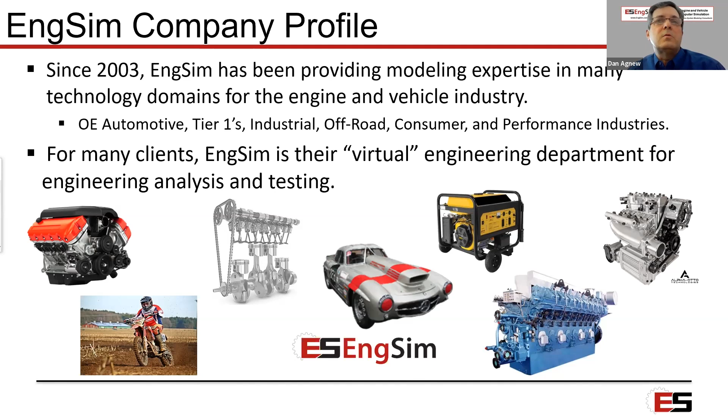And then some of our work is also with the big OEs and tier ones too. But for those companies, they might already have a lot of these capabilities. So we kind of fill some gaps where they may not have enough resources to do a particular job. So we may just step in and help them on some occasions where they just need a little bit of extra help.

Some of the domains that we work in, I mean, any one of these domains is a whole day's presentation on itself. But I'm going to focus more on the CFD, which is all the way over there to the right. But we also do a lot of work in engines as a whole, vehicles, electrification of any kind of vehicle, not just cars. Valve trains, that's something that I spend quite a bit of time in, and then also a lot of thermal analysis. That's becoming pretty needy right now. If you watch the newspapers with all the issues they're having in the electric car business, there's a lot of thermal issues there, and these kinds of tools can help a lot of that.

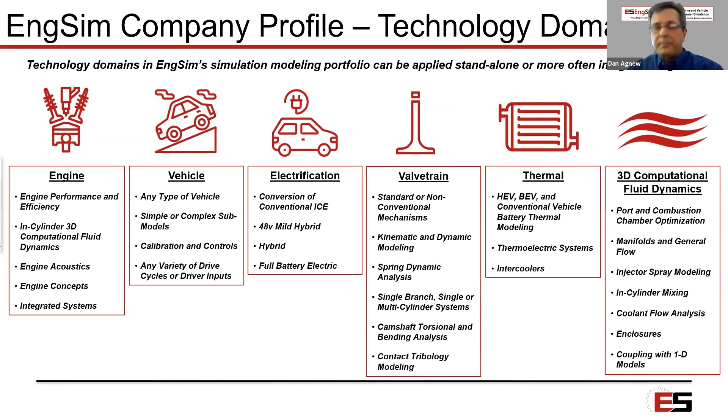You might ask yourself, well, why do we do this? Why do we care? I'm not pitching this as a replacement for good design and good testing, but actually a supplement for it. The testing is very important, and good design is very important. But this kind of analysis really makes that work much more targeted and efficient, and can improve the understanding. A lot of times with testing, you get good overall numbers, but you don't really understand why something happened. And this kind of analysis takes a deeper dive into understanding those whys. And you can take those thousands of crazy ideas and filter them down into just a few reasonable ones, and then go on with very targeted physical testing.

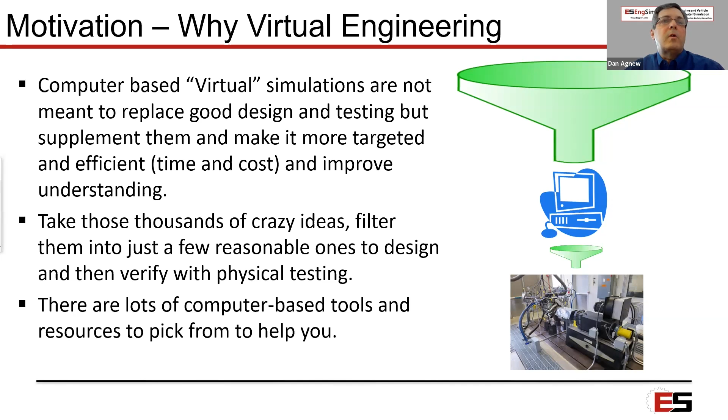For example, we're looking at a cam development program now with a race team, and they're trying to come up with a new cam, and they probably got 100 cams that they want to look at. Well, that's not very practical. They're going to blow up some dyno engines, burn a lot of fuel. We don't do any of that with this kind of analysis. So we can filter all those ideas down to just a few reasonable ones. And there's a lot of tools out there, and a lot of resources to help you pick from. So I'm hoping I can stimulate a little bit of that thought process to either look at some of these tools for yourself, or get some help on your projects from companies like us, maybe.

The 3D software that I'm going to spend most of the time today talking about is Converge CFD. That's the brand, and it's not a software that we sell. That's a software that we use. We actually have to pay them a lot of money to use this software. We're not a reseller, we're a user. We like this software because it's very well tailored to engines. Some softwares out there are really good at doing external body kind of flow work. Some of them are really good at internal flow work. And Converge not only will do it all, but it's really tailored to engine work, especially when you have moving pistons and moving valves doing transient flow.

And then if you want or need to incorporate a lot of the other physics platforms like acoustics, thermal, mechanical, chemistry is real big. If you're looking at doing combustion analysis, then you need a really good chemistry module in there. And electrical, if you're going to put a spark plug in there and light it, then you need some electrical physics going on there too. Like I said, this software is really well suited to doing moving pistons and moving valves while you're doing the flow. You can do turbochargers or water pumps with rotating impellers, that kind of work. It's really good at exhaust aftertreatment. That's not so much a topic for this kind of an audience, looking at emissions.

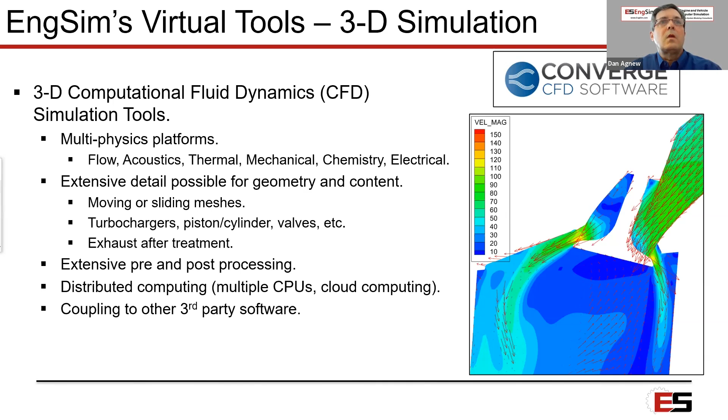Just a quick comparison, at the risk of maybe oversimplifying this, I wanted to go through this for a moment here, to compare this kind of CFD work with a traditional flow bench, if you're doing that kind of work. The resources you need: obviously on the flow bench, you need a flow bench. You need fixtures, machining equipment, testing accessories, you need computer software or a spreadsheet if you're doing any kind of data management with it. For the CFD, you need a computer workstation, you need software, and you need a license.

Personnel: with the flow bench, you need an experienced technician and a machinist to help you build your models. Similarly, with CFD, you need an experienced CAD or CAE engineer. For a test model on a flow bench, you need a flow box. You need something to test: the flow box or a head or manifold or whatever you're flowing. On CFD, you need a CAD model. You've got to have some kind of a CAD model to be able to work with.

And the output on the flow bench is pretty general and overall, looking at flow capacity or some in-cylinder motion, swirl or tumble. With the CFD, you get a lot more. Not only do you get that flow capacity and those general overall mixture motion kind of numbers, if you're looking at in-cylinder stuff like we're going to look at today, you get very detailed and localized speed and direction. You get heat transfer. If you move into some of the advanced combustion with transient flow, then you can get burn rates. You can mix fuel, air, PCV, EGR. You can put anything you want in there.

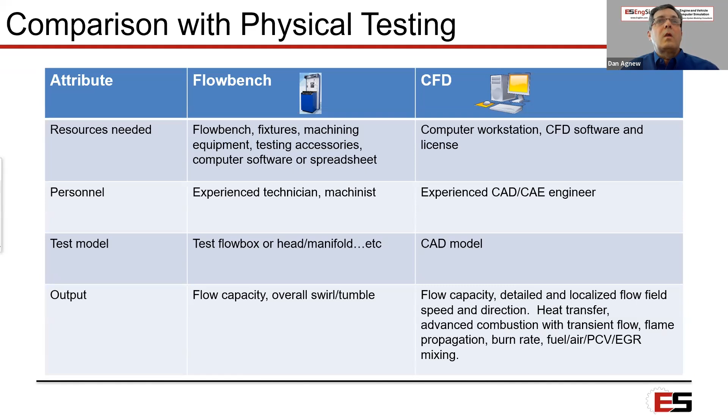I've got 4 case studies. The first 3 here, I'm just going to touch on because these are all very different kinds of applications of the software. The first one is a block and head coolant flow, and then we're looking at an enclosure, which you could compare to an underhood airflow on an engine. And then I've got kind of an interesting example. It was a real simple overhead valve generator application, but you could certainly extend that to any kind of engine. That's going to demonstrate some transient flow with moving pistons, moving valves and combustion.

And then I'll spend the bulk of the rest of the presentation talking about double overhead cam intake and exhaust port flow. Here I just modeled the scope of this project, and all I really had time to package up for this kind of a presentation is the steady flow with fixed valve lift.

Hey, Dan. Yes, sir. We talked that we might want to take questions; we're getting some coming in. And I don't want to get too far ahead, so before you get into another part of your presentation, I want to make sure we get these addressed now, and we'll do some more as we go on. Sure, go ahead.

Peter wanted to know: please describe how you select the cross-sectional area of an individual runner in an intake or exhaust manifold, for example. I'm going to give you all of them, and you answer them how you feel. He said, coincidentally, I just listened to an SAE presentation on Converge by Kelly. Also, does your company have a lot of experience with fuel prep and its effect on combustion efficiency? Okay, the first question. If I understand that right, someone was wondering how we pick port cross-sectional area and runner length.

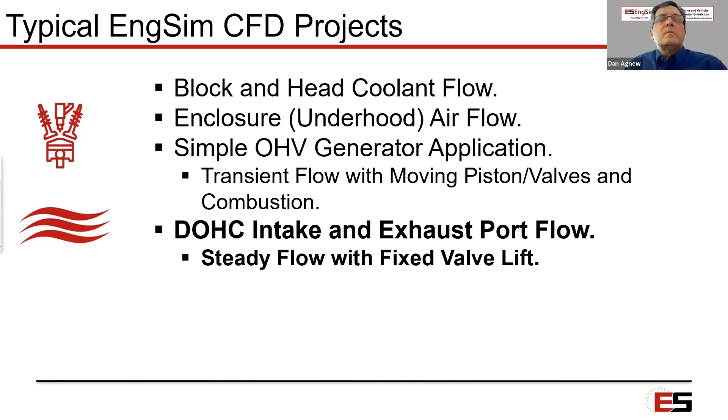Okay, this first example is coolant flow. The purpose of this project was to look at the coolant flow distribution through a block and cylinder head, and the only thing we had to play with here was a head gasket due to investment. People didn't have the investment money to go and look at changing sand cores, but we could modify the head gasket. So we wanted to take that and look at it.

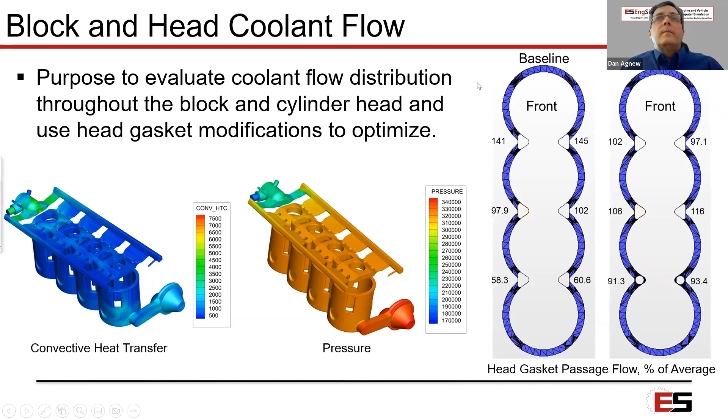I'm not sure if this shows up because on me this option 3 the screens are covering it up. I don't know what that looks like on the rest of everybody's screens.

But anyway, this picture on the left is the convective heat transfer coefficient, and that's an indication of how well you're going to be transferring heat to the casting, to the block and the head. And this is the baseline case. You can see there's a pretty good distribution from the water inlet to the water outlet thermostat area. So that's one indicator of whether we've improved anything. And the second picture in the middle is pressure. You want to be able to manage the coolant pressure through there.

And then we had a baseline here, and what I'm showing here are the percent of the average of the flow through the head gasket passages. You can see it's pretty wide, we go all the way from 145% of the average down to 58.3%. And by the time we got to option 3, so I can move this over here now, didn't know I could move that, we got it pretty well distributed. We go from 102% or 97% down to 91. So we made some pretty good improvements just by playing with the areas of the gasket. So that's the kind of work you can do with coolant flow in a block.

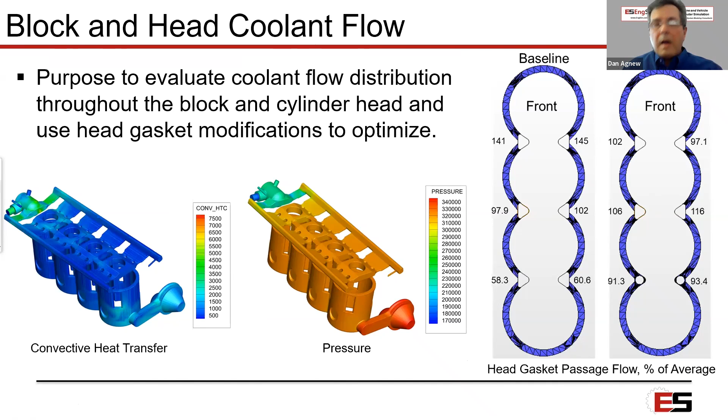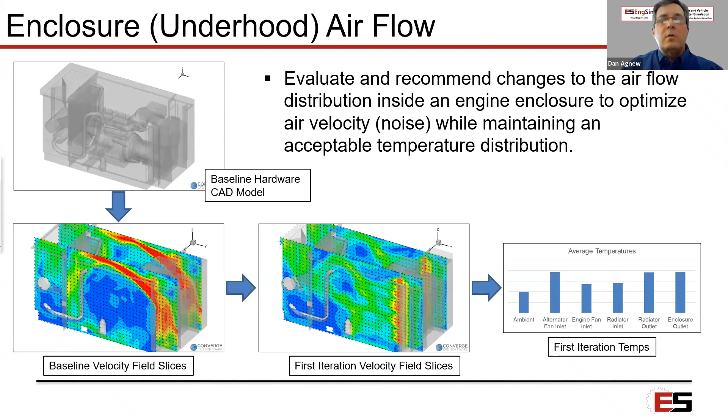And then in one iteration, we were able to make that very uniform, playing with the front entrance on this enclosure. We have a very uniform velocity gradient in the front, and it's pretty uniform throughout there. And then that indicated that really leveled out the temperatures inside there. So that's just an example of some of the underhood kind of airflow applications we can apply this to.

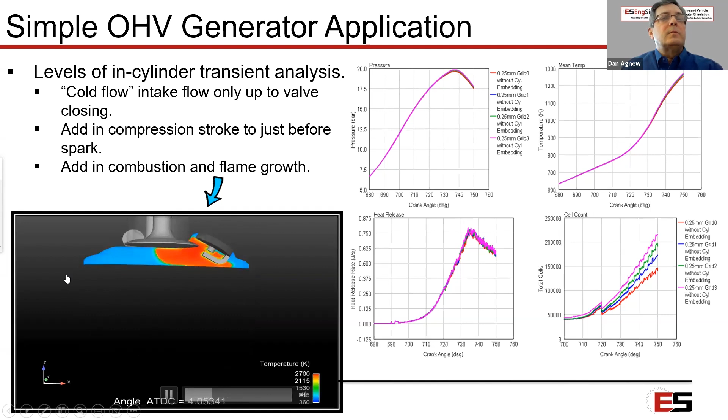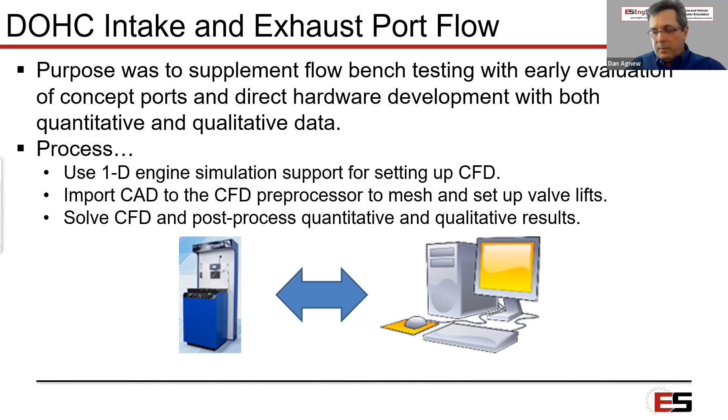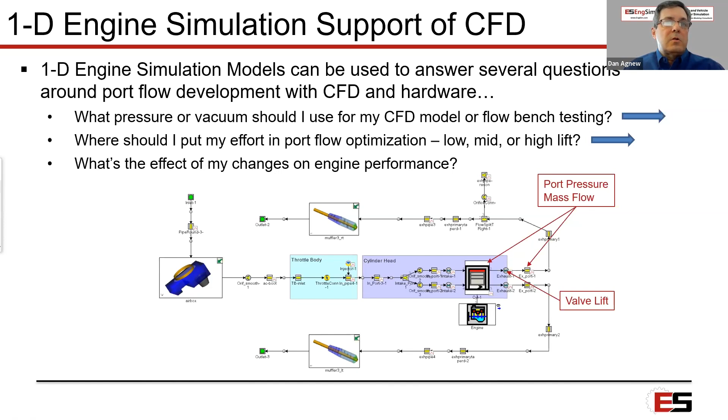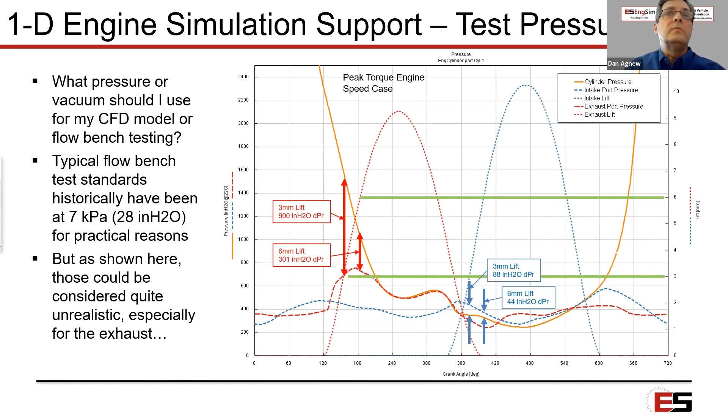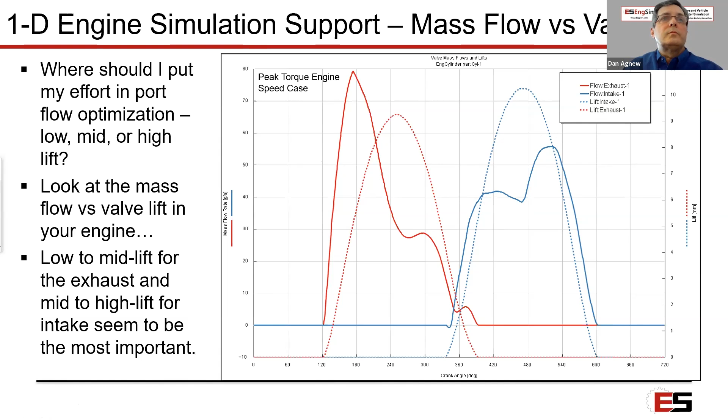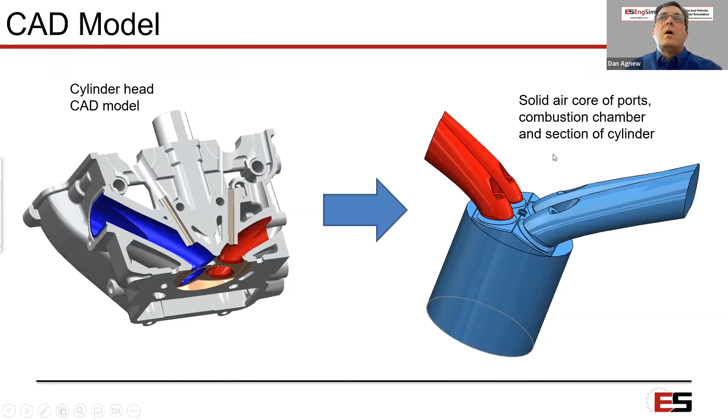All right, now we're gonna talk about the CFD model specifically. We start with a CAD model. You got to have a CAD model. You can't really do much without that. From that, we extract a solid air core of that model, and we bring that into the preprocessor to mesh. This is done with the Converge preprocessor. You can see that here we have this model set up at 3 millimeters of lift. You can see the spark plug here; this little green square is a side view of the spark plug gap.

One thing that we did on the intake is we separated out this disc in the middle to look at mixture motion. We wanted to come down a little bit from the top of the cylinder, and from this we're going to be able to look at swirl and tumble. And similarly on the exhaust, I'm not concerned about mixture motion on the exhaust side, but the mesh model is constructed much the same way.

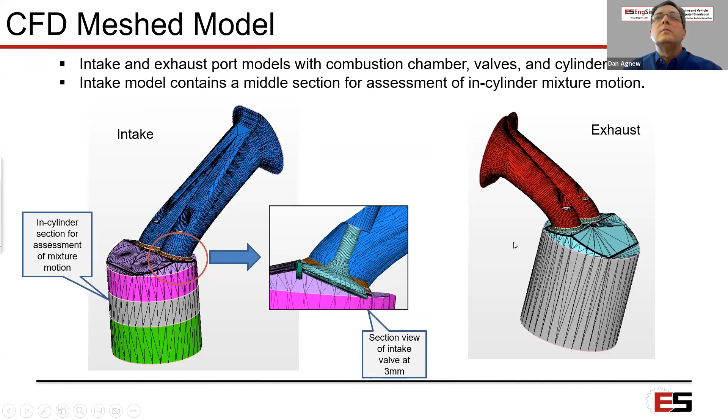So I take this and set it up for an intake flow bench simulation. I have a big plenum on the intake; all these red panels, that's where the air comes in. It simulates the room that the flow bench is in. And the light green around the bottom, that's like the plenum at the bottom of the flow bench. We set this up for this study at 70 degrees F and 28 inches of water vacuum. We have 3 cases: both intakes at 3 millimeters, both intakes at 6 millimeters, and another case, because we were curious what it would look like, with one valve at 3 and one valve at 6.

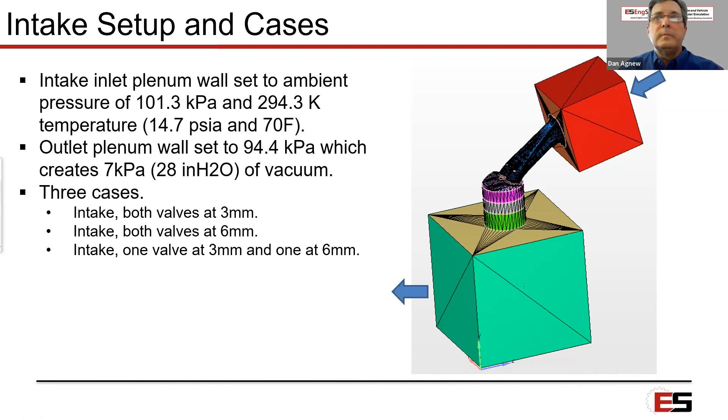On the exhaust, much the same. We put a big plenum on the port outlet and then use the same plenum on the inlet, set that up again at 70 degrees F and 28 inches of water across from one plenum to the other. And here we looked at 3 millimeters of lift and 6 millimeters also.

All right, Dan, let's address some of these questions before we get much further along here. Jerry would like to know, how do you handle cylinder variation of boundary conditions in a two-plane V8 combustion model? That's one question for you.

I guess I don't know if I understand the question. How do we address boundary conditions? How do you handle cylinder variation of boundary conditions in a two-plane V8 combustion model? A two-plane. I'm not sure if he's talking about a two-plane intake manifold. I guess I'm not sure exactly. Maybe if we can ask him to clarify his question a little bit, and we can come back. Okay, get back with us there, Jerry.

And then Andrew wanted to know. Hang on a second here. I'm having a little trouble with my fingers today. Hang on here, Andrew. Every time I move this thing it's jumping 400 feet in one time.

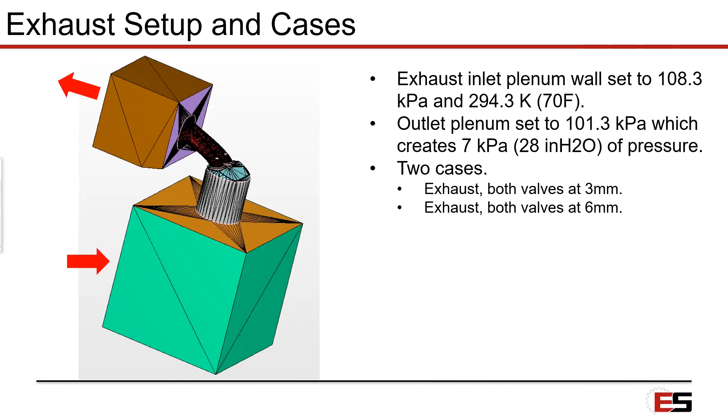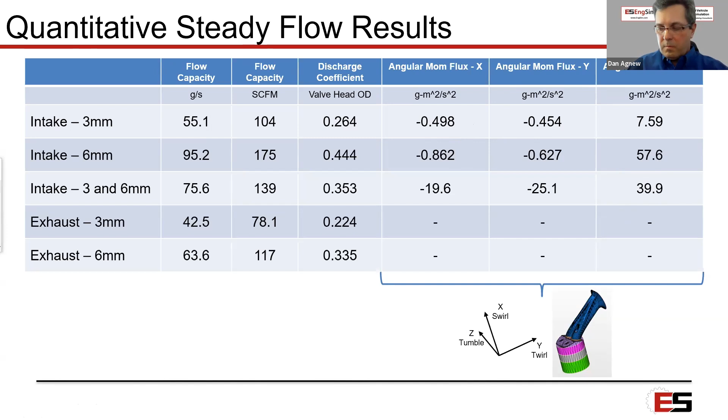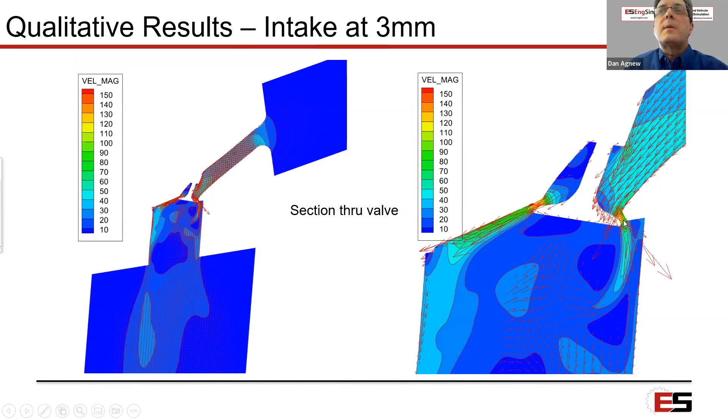But you can see this isn't technically choked flow here, but it's very restricted flow right there at the valve seat at 3 millimeters on the intake. And you can see there's going to be a lot of propensity to separate there. If I zoomed in even farther, you could see separation.

But these are the kinds of pictures that in my career, I've worked with a lot of good flow bench technicians. And when I show these kinds of pictures to a flow bench technician, their eyes just light up, because, oh my God, I've never seen the air going through the port like that. You can stick your finger in it. You can stick all your little probes and tools, and you can poke around in there, but you can't see the flow. Here I'm showing these flow bench techs what the flow looks like, and it's very enlightening, where that guy can then go back and do some much better development once he can see what the physical flow looks like.

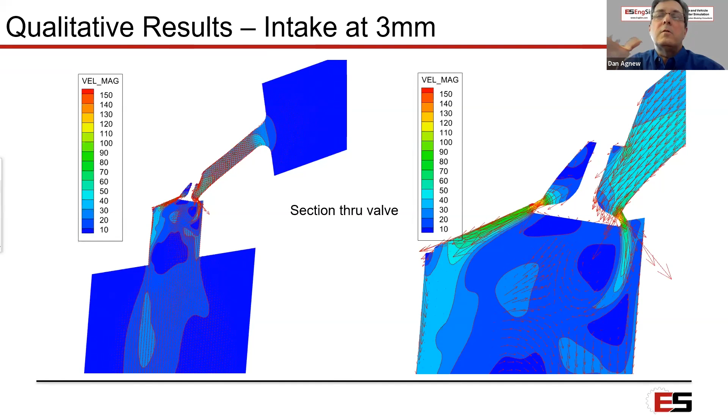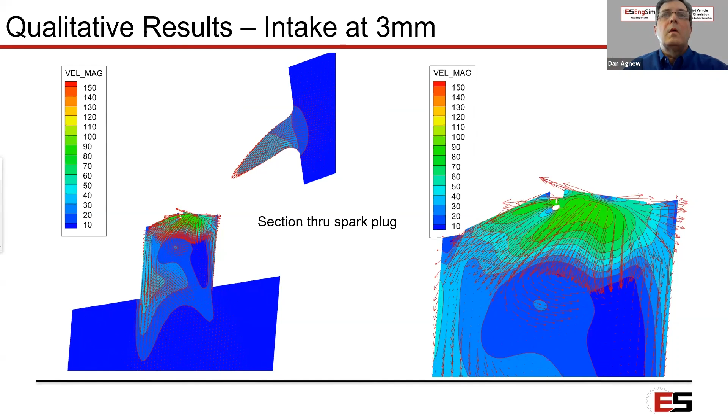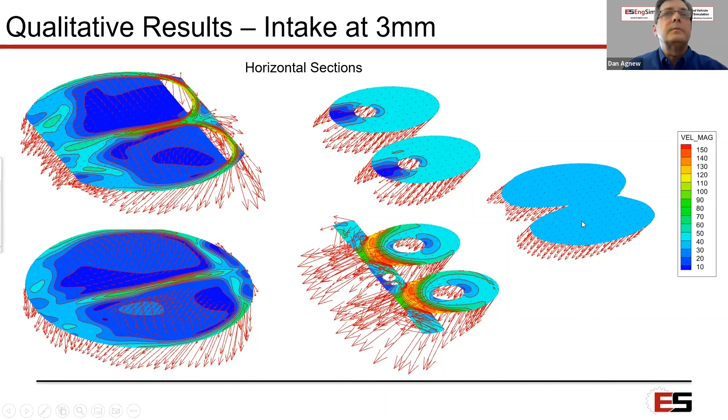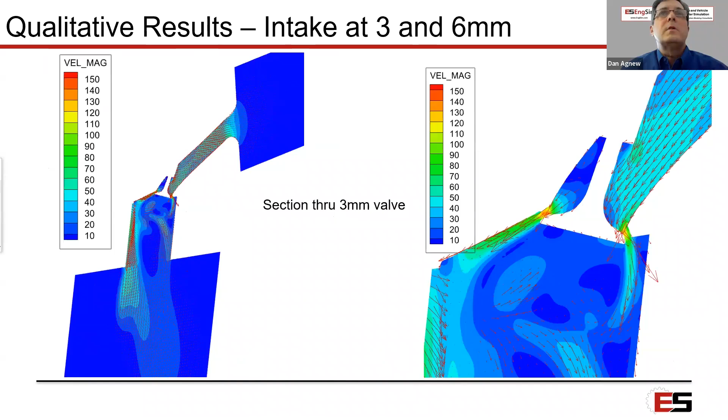I'm gonna skip through the 6 millimeter here to save some time, because I want to show some of these others. This is a 3 and 6. This is a section through the 3 millimeter valve.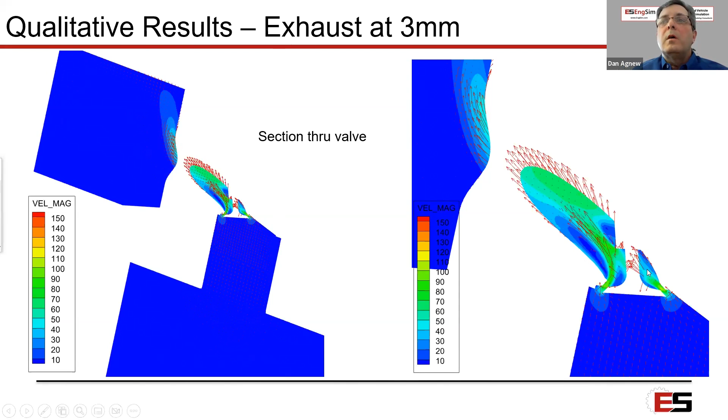This big blue area on the short side. The flow looks like it just wants to come in here and detach and go to the roof. So that's a lesson we're learning here. And then on the long side of the port, it comes in and hits the stem and the guide and gets kind of messed up behind the guide too.

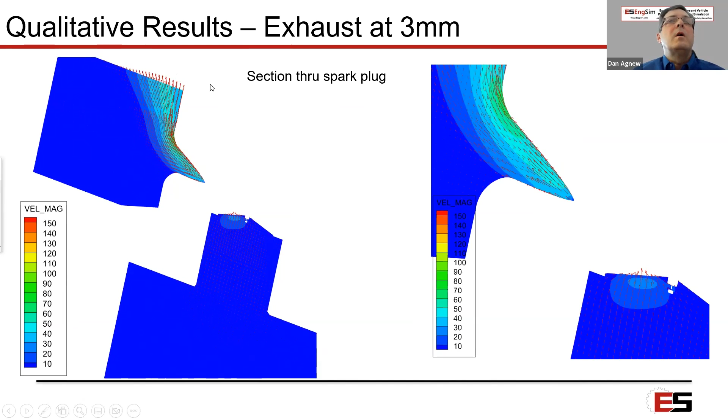And the other, I'm going to show, this is through the spark plug. So through the center of the spark plug, the way the port is designed, you're looking at kind of the end of the port. You can see where the flow is pretty well stuck to the roof, and then it just shoots up. I want to show this at 6 millimeters also, because it's even more exaggerated at 6 millimeters. Look at the way this flow just kind of takes off through the port.

And what this tells me is that the setup I have here is probably not as good as it should have been. I probably should have put a section of pipe out here to extend it, because this is not realistic. In real life, the exhaust doesn't just dump into the room. It goes into a manifold or a header pipe or something. So to be more realistic, I probably should have put a section of pipe on here.

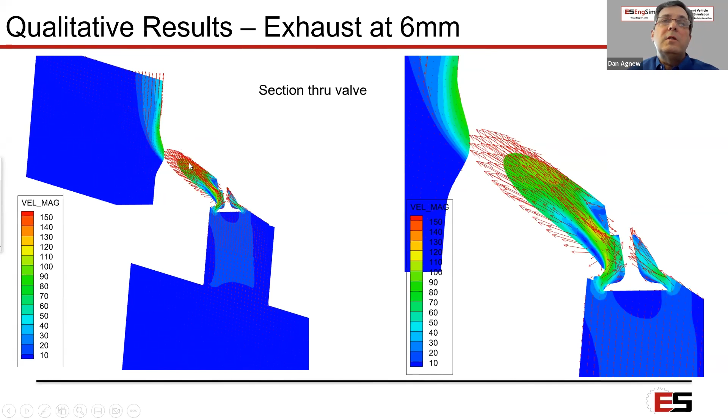That's very typical in doing flow bench testing, but this demonstrates why you would want to do that. And the next time through this CFD study, that's what I'm going to do. I'm going to make this plenum bigger, and I'm going to put a pipe on it. So that's one of the lessons we learned. The horizontal sections.

So I think I want to save some time here. I pretty much talked through some of these observations already. I think that this indicates that the flow capacity could be improved. The Cd's kind of indicate that there's some help. The exhaust short side detaches, pushes to the roof. Modeling demonstrates the deficiency with the exhaust port outlet and plenum the way I modeled it. That needs to be improved next time.

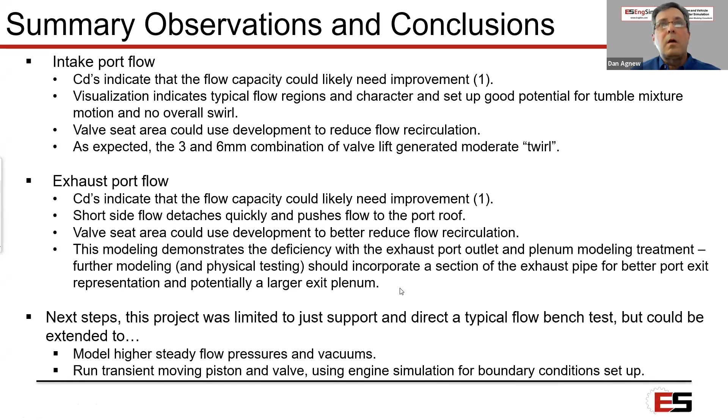So where I see this is going, just as a kind of wrap up here and maybe have time for some more questions, I think this industry is just growing at leaps. It has been for decades, really. It's going to continue, and it's going to get faster and faster. There's going to be a lot more development like combustion and emissions, exhaust after treatments. There's going to be a lot of combining of these models together. Everything's just going to get faster and easier to use.